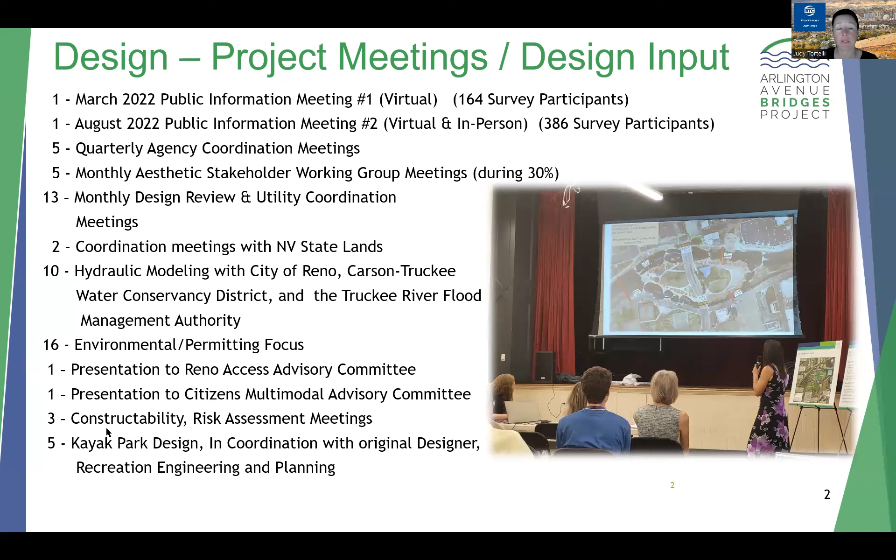In addition to public and agency coordination, I would like to highlight several project constraints that have also shaped our project into its final design configuration. The environmental constraints include the project being located within the boundary of a U.S. Army Corps Civil Works project defined by the 14,000 cubic feet per second floodway. This limits the ability for changes such as placing additional embankment within the project limits.

Several parks and recreational facilities are located within the project limits, including Wingfield Park, Barbara Bennett Park, the Riverwalk, and the Truckee River Whitewater Park. Protection of endangered species is required during the initial investigations for final design components and when defining constraints on the construction means and methods.

Some of the design constraints include the height and location of the existing flood walls along the edges of the Truckee River Channel that limit opportunities to lengthen the bridges and provide additional capacity for higher water flows. Placement of additional dirt fill within the floodway is restricted due to increased flooding and Army Corps permit requirements.

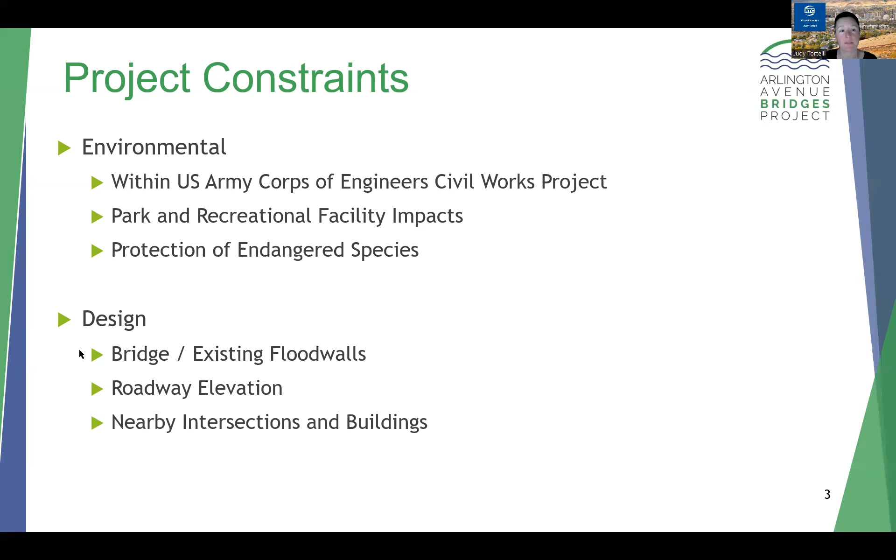Based on the survey results from the August 2022 pre-recorded presentation and in-person public meeting, the bridge aesthetics will consist of an all-metal railing, custom light columns, and tall end pylons. Here is a photo rendering with the chosen aesthetics applied to both the north and south bridges, looking eastward toward downtown Reno.

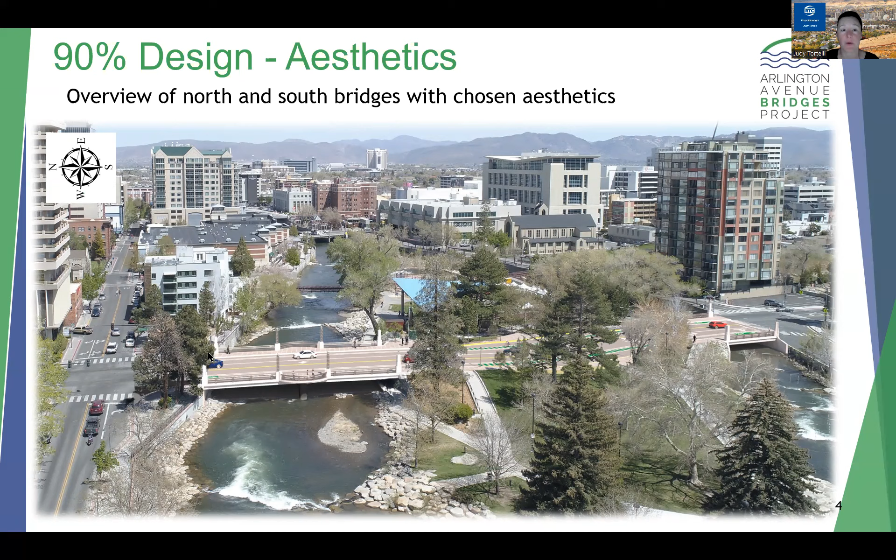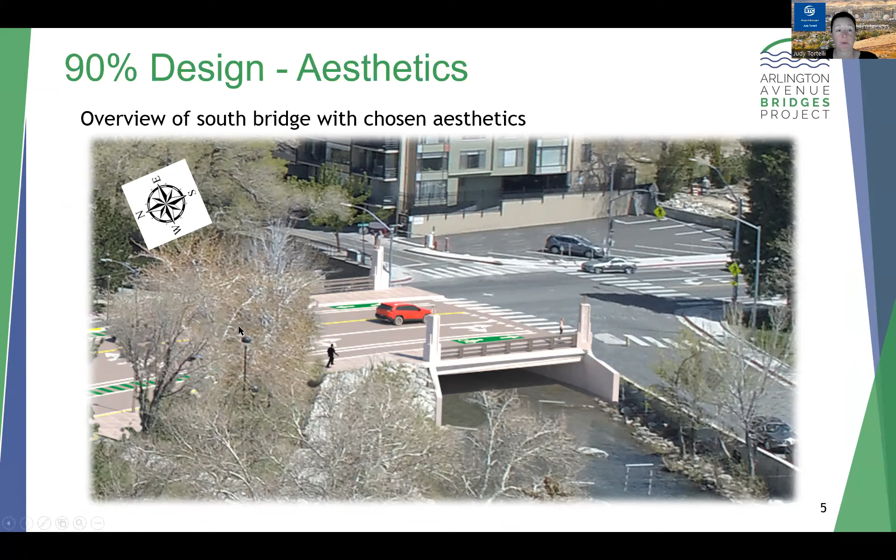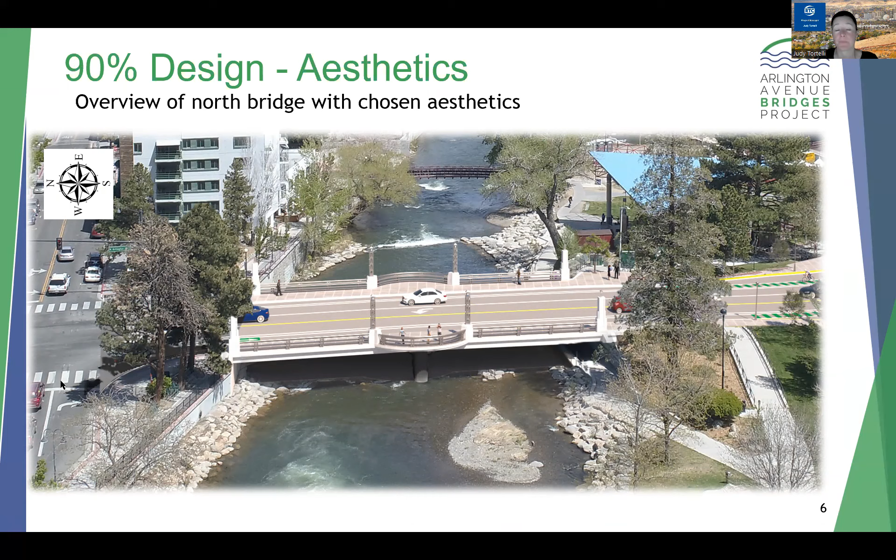Here is a zoomed-in view of the photo rendering with the chosen aesthetics applied to the South Bridge. And here is a zoomed-in view of the photo rendering with the chosen aesthetics applied to the North Bridge. Here is a park level view of the photo rendering with the chosen aesthetics applied to the North Bridge.

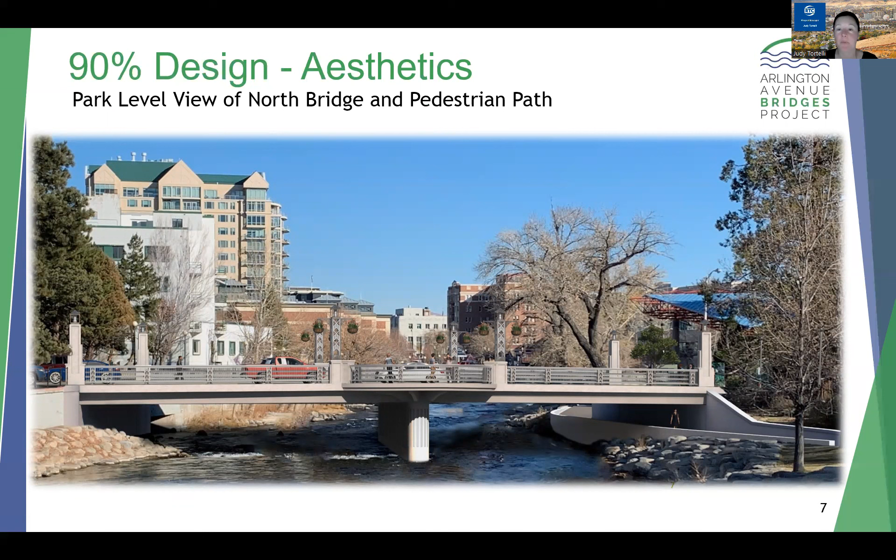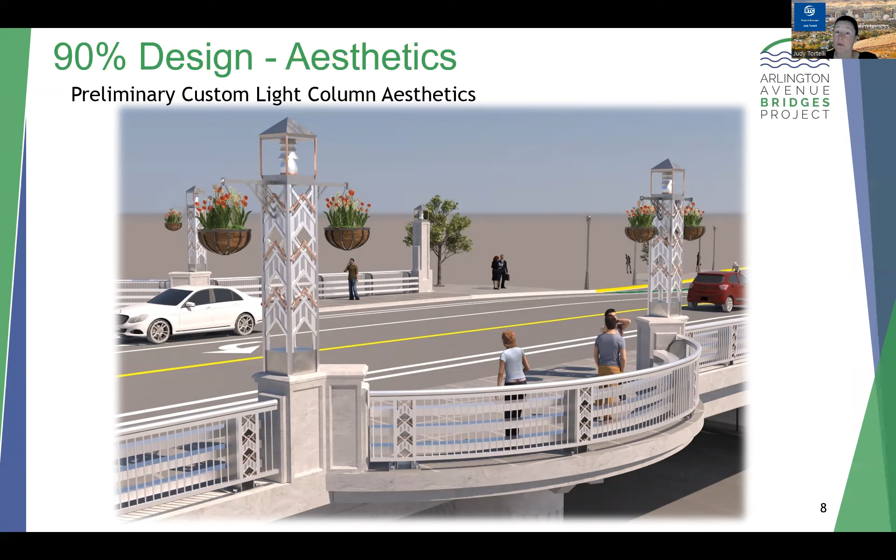You can see the form liner patterning applied to the end of the center pier and the path under the south end of the North Bridge. Here is a zoomed in rendering of the North Bridge overlooks with the custom light columns and all metal railings. The concrete faces of the bridge abutments and center pier of the North Bridge will be patterned.

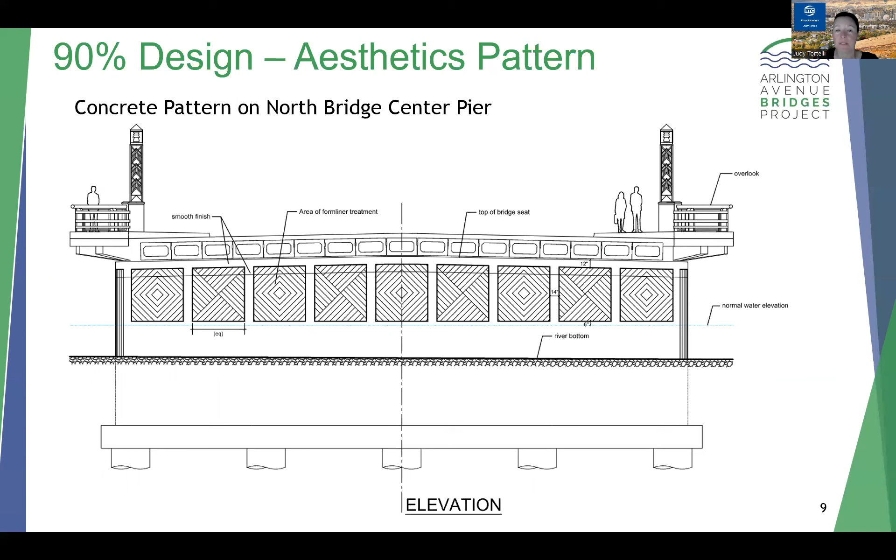The bridge abutments are located at both ends of the bridges and act as retaining walls, restricting earth and fill to provide structural support. This slide shows the pattern that will be applied to either side of the center pier of the North Bridge.

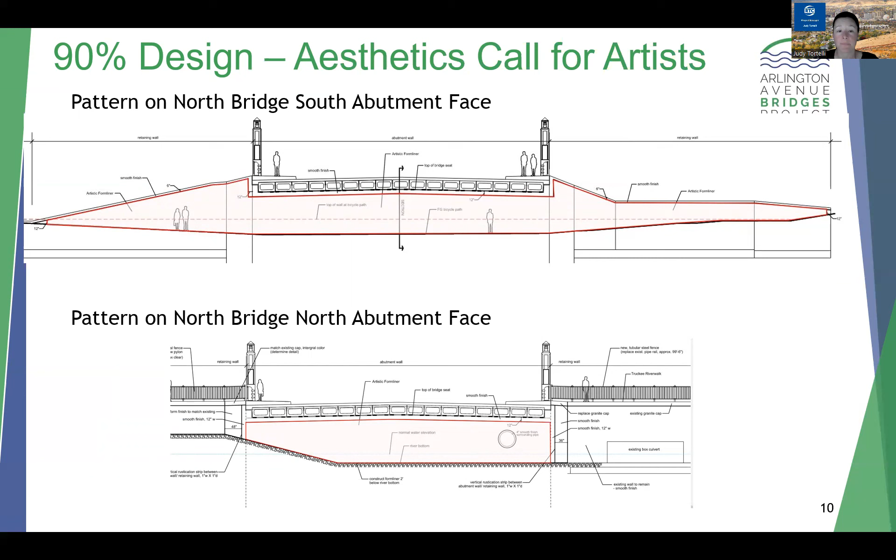For the abutment walls of the North and South bridges, we are working with the City of Reno to solicit public artist design ideas that meet our project specifications, are compatible with the patterning on the center pier of the North Bridge, and meet the approved modern art deco aesthetic theme. This slide shows the available canvas at the North Bridge abutments. This slide shows the available canvas at the South Bridge abutments.

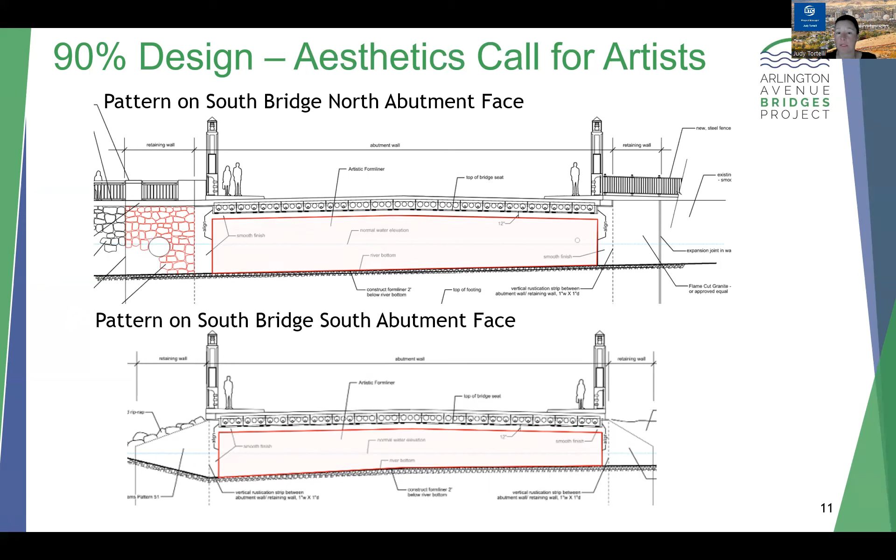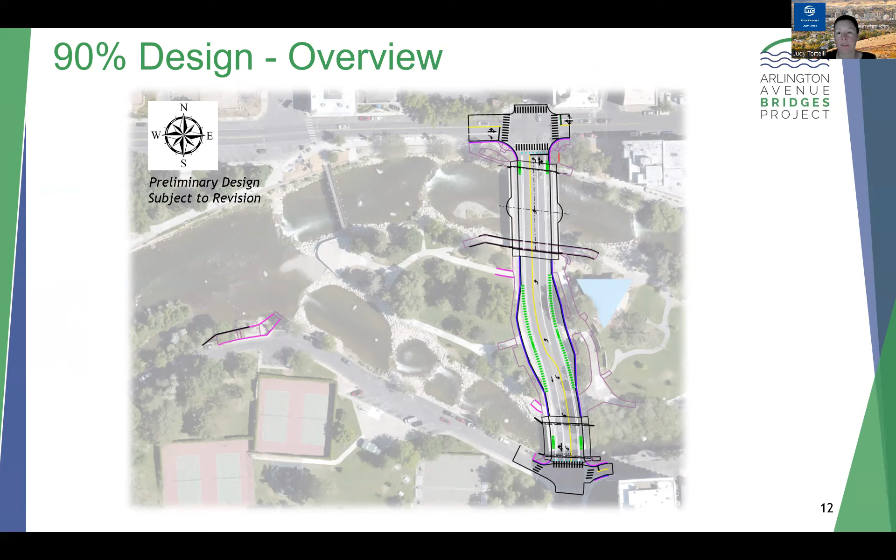Here's an overview of our current project design: the maintenance access ramp located off of Island Avenue and the project improvements along Arlington Avenue. First, let's look closer at the maintenance access ramp.

At the City of Reno's request, we are widening and realigning the existing ADA-compatible pedestrian ramp to allow maintenance access to the river. With this design, an excavator or other equipment will be able to enter the river channel, while a dump truck can back down the ramp to be filled by an excavator.

The slope of the ramp will still be ADA compatible with landing areas appropriately spaced along the ramp, serving the dual purpose of 1, increased pedestrian access, and 2, maintenance access to the river channel. To maintain the hydraulic capacity of the river, a retaining wall is required. The wall runs along the beginning of the ramp, as seen in black, until the elevation difference limits the amount of fill required.

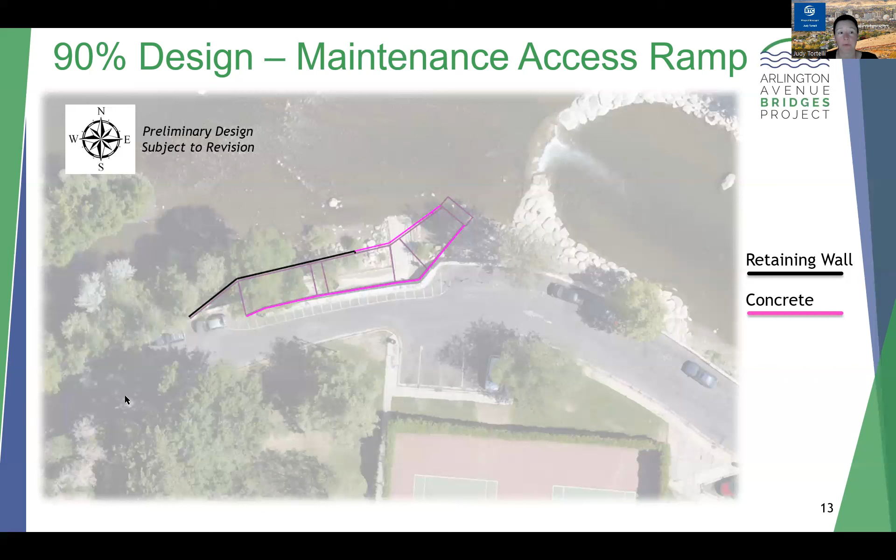Now let's take a look along Arlington Avenue. Starting at the south end, or left edge of the slide, the intersection will be repaved as a result of the impacts when constructing the South Bridge abutment. We are adding a striped pedestrian crosswalk across the north side of Island Avenue intersection, so all 4 legs will be clearly marked. The sidewalk bump outs you see at the south side of the South Bridge are still a work in progress. We are working to increase pedestrian circulation and minimize or eliminate these bump outs to ensure there is adequate room for fire truck turning movements.

In between the bridges, the roadway area is widened, serving a dual purpose. 1, providing additional room for Route 6 transit stops in both directions. And 2, maintaining room for loading zone areas within the project limits. The existing path connectivity to the sidewalk along Arlington will be perpetuated, as will the path under the south end of the North Bridge.

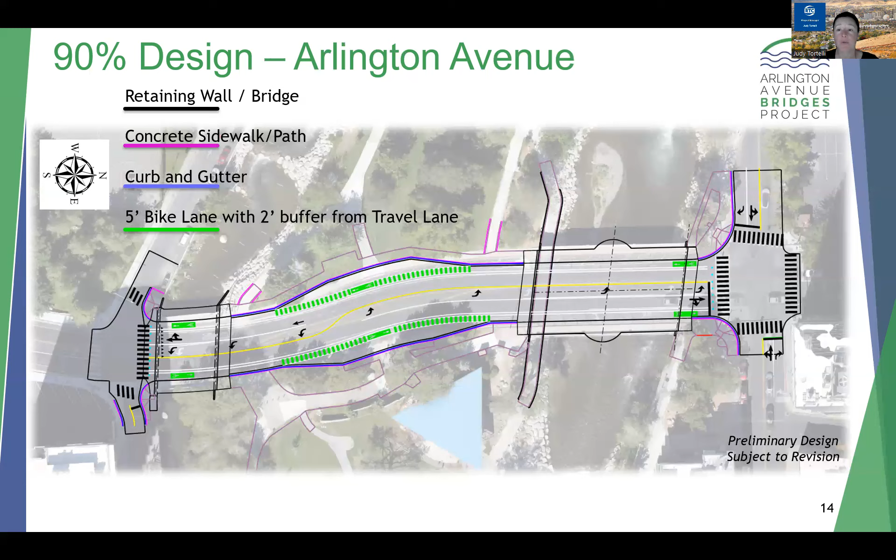The sidewalk along Arlington will be 8 feet wide to accommodate the high pedestrian usage within Wingfield Park. A continuous 5-foot bike lane with a 2-foot striped buffer from the travel lane will further enhance multimodal safety through the park. The lane configuration provides a dedicated left turn pocket at both Island Avenue and West First Street, with a shared through right lane in both directions.

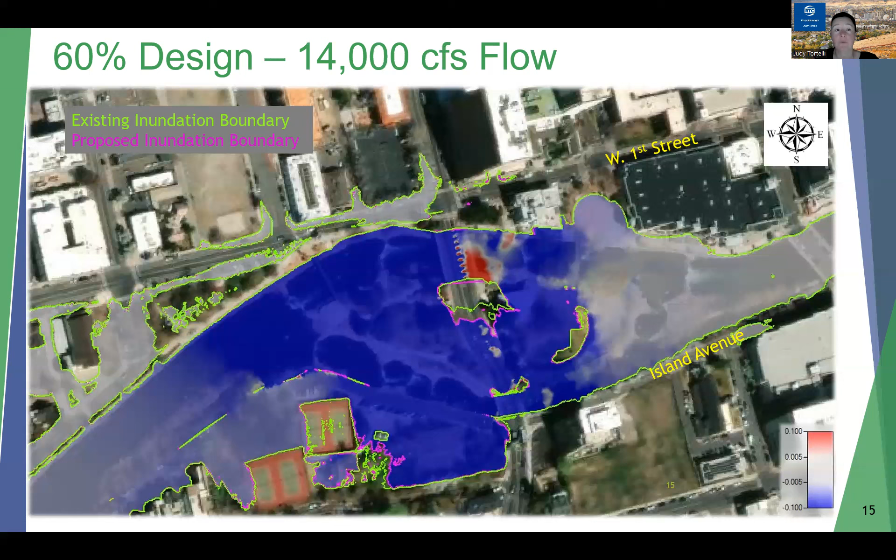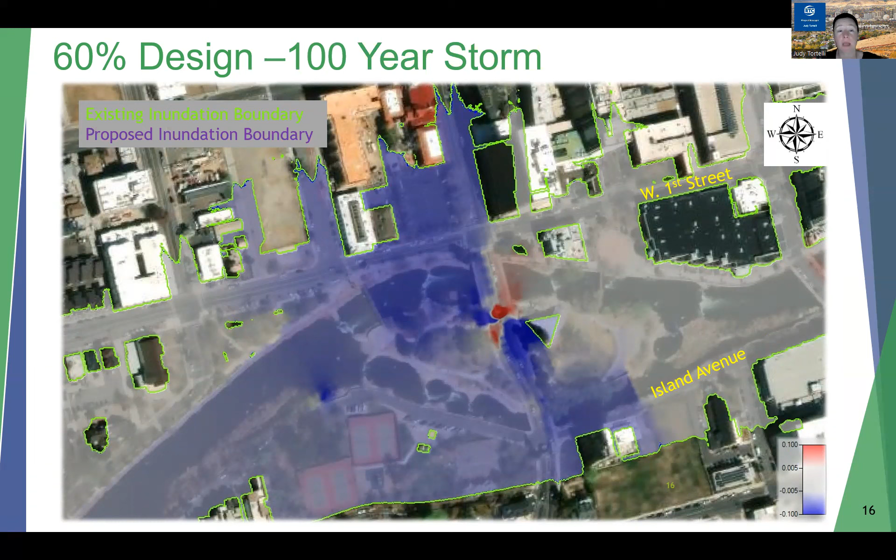The blue area indicates a decrease in the water surface elevation up to approximately 1/10 of a foot. The area of red just downstream of the North Bridge indicates a localized increase in water surface elevation as a result of slightly increasing the hydraulic capacity under the bridge, but then conforming back to the existing channel geometry. Similar to the 14,000 cubic feet per second flow, the flooding impacts within and adjacent to the project area will remain the same after the bridges are replaced.